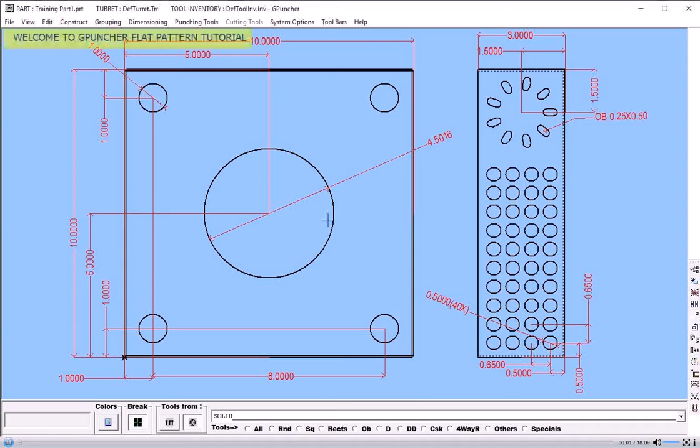This tutorial is about how to do the layout from a print. You can see the part has 10 inches in X and 10 inches in Y, and it also has 4 flanges coming up at you, which is 3 inches in size. And it has a circular pattern.

As you can see, it's an obround, and it has a square pattern with a round half of an inch. The main base has 5 holes: one in the middle, which is 5 inches, and 4 holes at the corners, typical 1 inch by 1 inch, each 1 inch diameter.

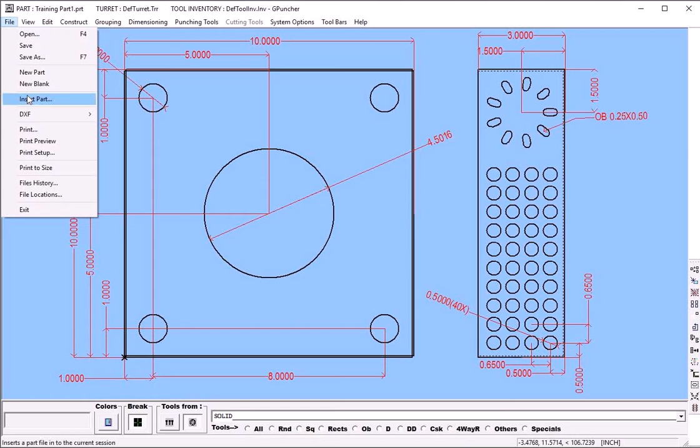So we're going to do the layout from this print, okay? We're going to start by saying File, New Blank, correct? As I said, it was 10 by 10, so I'm going to leave it as is, and start with a dotted line, and just click OK. So it goes to the sheet, and we're going to go back to the part design, where we're going to start designing the flat pattern.

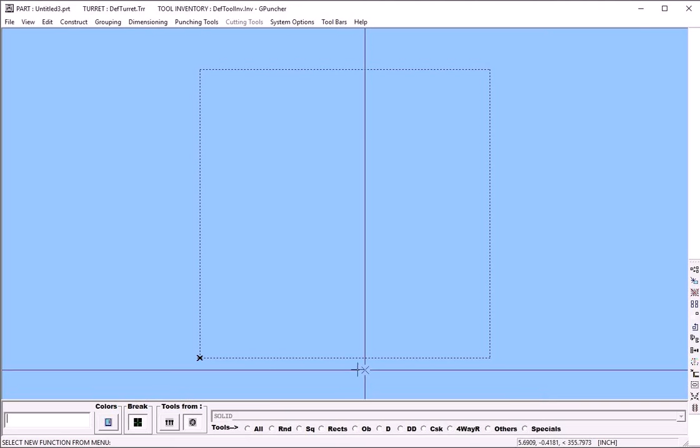And there we go, we have a 10 by 10 inches base, and right away we're going to insert the holes that you were looking at in the part tutorial, okay?

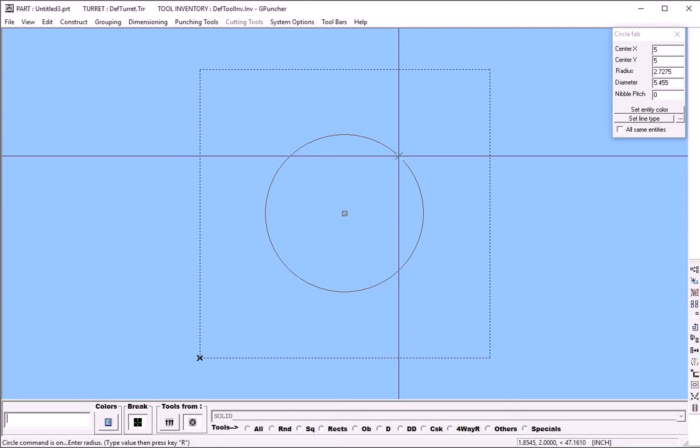I'm going to start with clicking the circle command, and I put one in the middle. I'm going to type in its coordinates, 5, 5, so we're right in the middle of the base. Now it needs a radius or diameter, but I'm just going to click it, and then come here and fix it to 5 inches and press enter.

You always got to press enter on any box where you change a value, no matter what box it is, okay? Don't forget to press enter.

Now I'm going to add the 4 holes at the corners. The first one, on the bottom left corner, the coordinates are 1, 1, and I'll press enter. This one, I'm going to control the radius or diameter differently, using a keyboard shortcut, which I'll show you in a minute. I'm going to type in 0.5, which is half of the diameter, and press the letter R, as in Robert, for radius, and there we go. It became a 1 inch diameter, as you can see here.

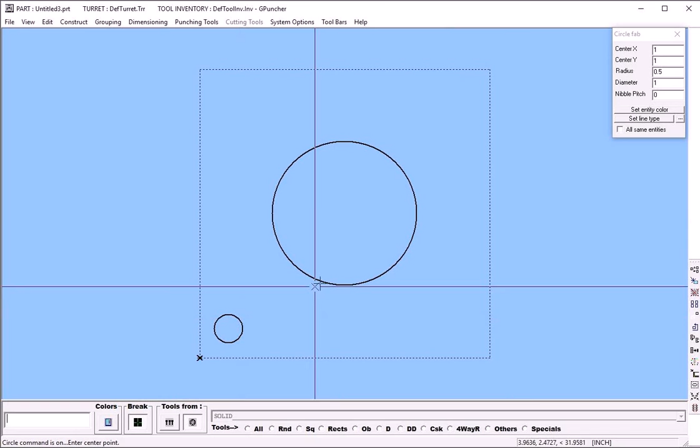Keyboard shortcuts. You can always get help and see what the letters do, like the letter Z, which activates the zoom in command. The one we use is R, which sets the radius of any geometry, and that's the one we use to create a hole, okay.

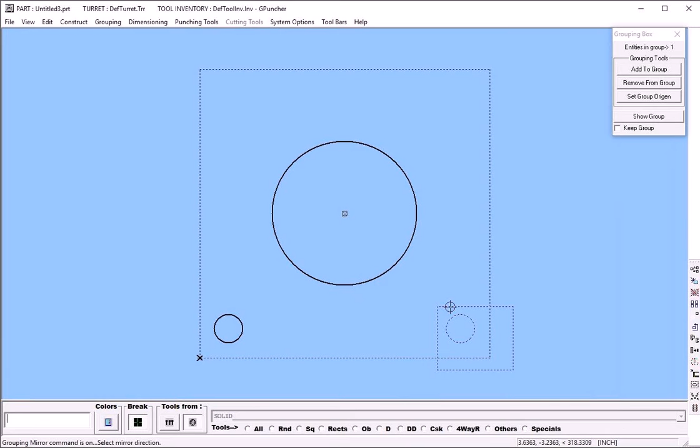Now continuing with the training, I'm going to mirror this hole 4 times at the 4 corners, which is typical. So let's use the grouping and mirror command and make a box. I'm going to find the center of the part, which is right in the middle. I do a right click to find the center of that hole, and a left click to grab it. Now, to mirror this feature to the 4 corners, I'm going to say keep group, so I can do so. I'll left click here, left click to carry on the command. And sure enough, now what's next?

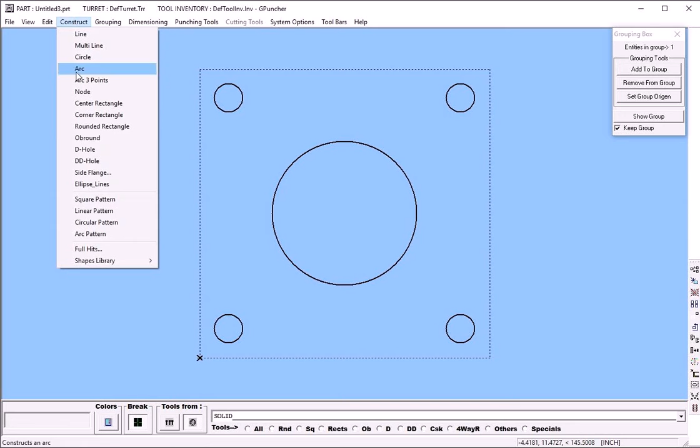Next is to add the 4 flanges coming at you. When you bend it, you're going to be looking at these 4 flanges coming at you, and we're going to do so using a menu command here called side flange.

Immediately it asks you for a bend deduction. You're going to find out that that's what you're going to use for 16 gauge, okay? Let's think about this part as 14 gauge, so around for 14 gauge in your shop you might be using 110 thousandths. I'm going to press enter, and the flange is 3 inches.

So make sure once you set your bend deduction and flange height, all you got to do is click the lines. It's going to ask you inside or outside, and of course we want it on the outside, and you go on. Okay, simple, no big science on this.

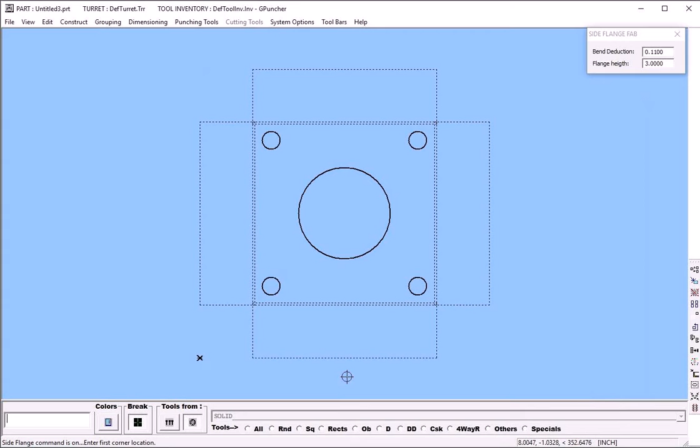Okay, you've got the 4 flanges coming up at you, and you can easily verify them. As you can see here to here, you're going to see your bend deduction, and from outside to outside, this is your flange size, 3 inches, and it's the same for all 4 flanges.

I'm going to delete all the text, and we're going to keep going. You saw we have the square pattern around this area, and that's what I'm going to add.

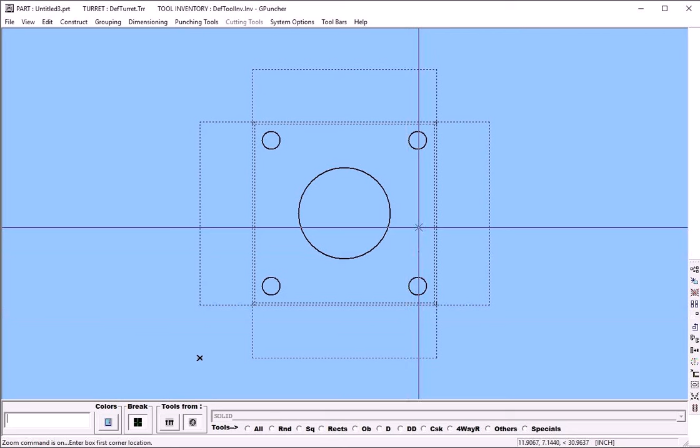I'm going to click on construct. Actually, let's do this—I'm going to show you how to move your origin point. There are two origin points. We're going to use the movable origin point right now, and I'm going to zoom in. I'm gonna place it right at the corner. Let me go back and say move origin, place it right at the corner, and from there we're gonna create our square grid.

I'm gonna say construct, and it's a circle. We click on circle, and the coordinates are 5 to the right and 5 up. So I'm gonna say 5, 5, and press enter.

Okay, I made a mistake. It's okay to make mistakes—just get out and come back in and say 0.5, 0.5. Make sure the values are correct and press enter. Now this point is asking for the diameter, so I'm gonna say half of it, 0.25, and press the letter R for radius as the shortcut describes it. The keyboard shortcuts—I just press the letter R as in Robert. There we go, we have our first hole.

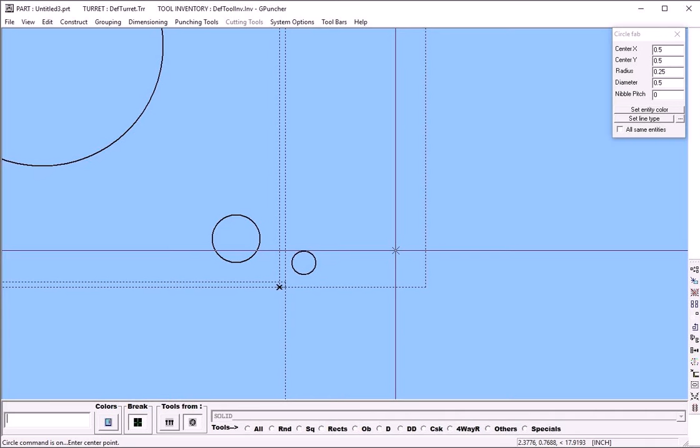I'm going to scroll down a little bit, and now the next thing, we have a command here on construct called square pattern. I'm going to grab the hole, and the distance in between the holes is 0.650, 0.650. Type it in and press enter. All you got to do is drag your cursor along and count the holes. I want 4 in X and 8 holes in Y. You can see the number on the right upper corner. So I'm going to do a left click to carry on.

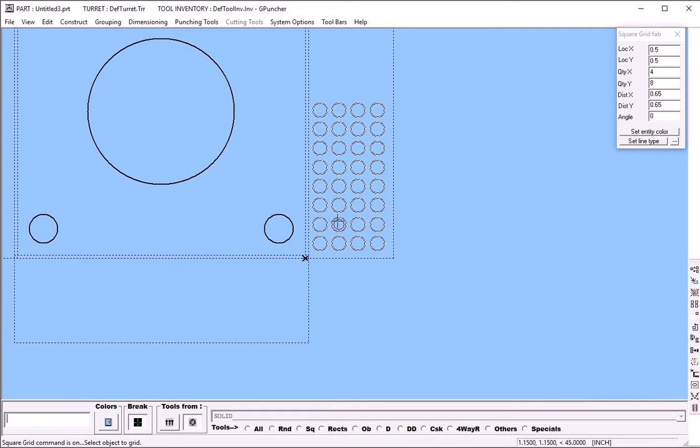Now I'm going to go back and see the full part. You can go here and say zoom fit, which is okay, or you can use the keyboard shortcut letter F as in Frank, which is quicker. So let's keep going.

Now I'm going to add the circular pattern around this area. For that, I'm going to go to construct, click on obround, and zoom in on that area.

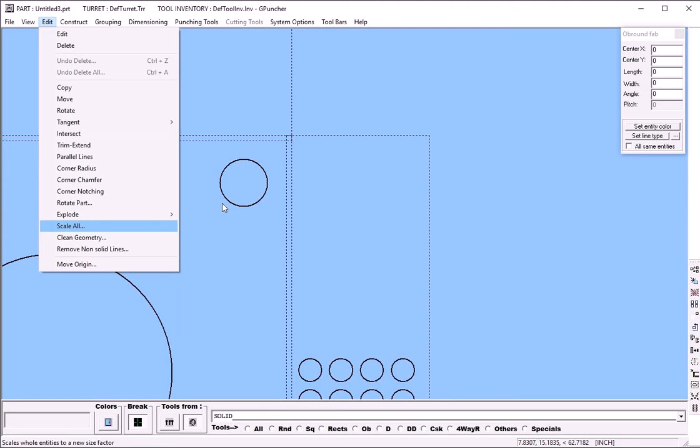As I said, you can always move your origin point, but we have two types of origin points. So I'm going to use the keyboard shortcut, pressing the letter O—remember, it's described here under keyboard shortcuts. I'm going to do a right click to start snapping to points, and place it on the outside of the flange.

Now I know the coordinates—you got to place it right in the middle of the circular pattern. So I'm going to say 1.5, comma, minus 1.5. There we go, the obround is going to be right in the middle.

At this point, what's next? Next is to lock up the angle. You can always lock it up by typing in the angle—I'm going to say 0 and press the letter A as in apple, as in angle. So you lock up your obround at 0 degrees, and you can see it on the right upper corner box. Angle, it says 0. It's like that, it's not going to change.

Now what I need is the length. Remember, your temporary origin point now is in the middle of the obround. So what are you going to do? Type in the length from the middle to the end point. If it's going to be half of an inch, type in 0.25, and you can always press the letter R to lock up the radius or length, or press the letter X. As a general rule, I would use the letter R because it works in any angle. So I'm going to press letter R, and as you can see on the right upper corner, it says 0.5 length.

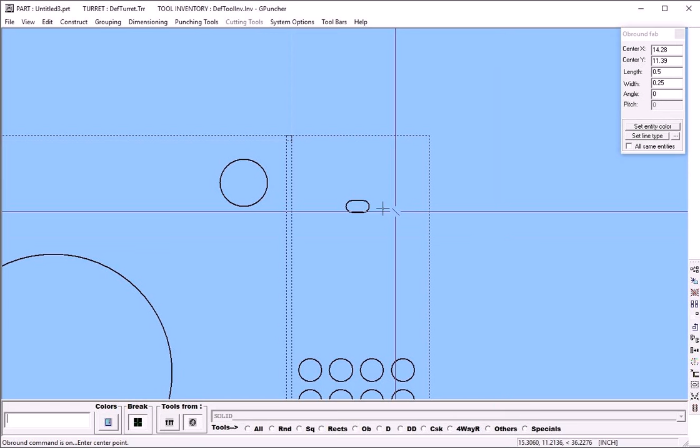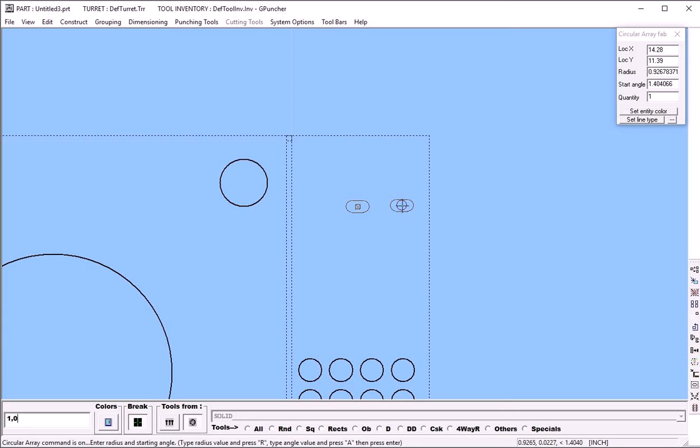Right, now we need to convert it into a circular pattern. So we're going to say construct, circular pattern, and I'm going to grab it. Now I know it's 1 inch in between holes for the starting hole of the circular pattern, so I'm going to say 1, 0. You can see the temporary point now is in the middle of the pattern, right there.

So that's why I say 1, 0 and press enter. My first hole starts 1 inch away from the center. Then you drag along your cursor and get the amount of holes that you want. In this case, I want to get 8. I'll do a left click and it's fully done, okay?

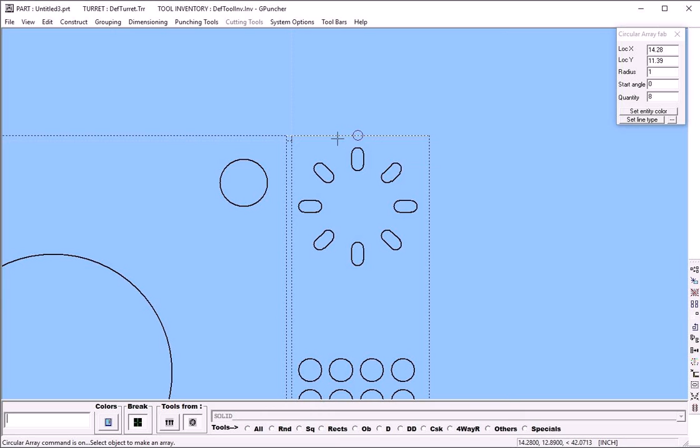Now, as I say, you can always come and say zoom fit, but I'm not going to do so. I'm going to just use the letter F, as in Frank, as in full view, okay? And it's described on help, keyboard shortcuts.

We're almost done. Now all I need to do is construct the outside profile that I want to punch. If I punch it like this, when you bend it up, it's gonna crash. So I've got to cut a material thickness here and a material thickness here.

There are two ways to do it. We're gonna do the first way on this corner and the second way on this corner. In fact, you might find out later that you can do many ways, okay?

So the first thing I'm gonna use is the parallel lines. I'm gonna zoom in, press the letter Z, as in zebra, as in zoom in, and get there. And I'm going to do the offset, the parallel lines.

Matter of fact, I made a mistake. We said it was 14 gauge. I'm going to delete it. As I said, it's okay to make mistakes.

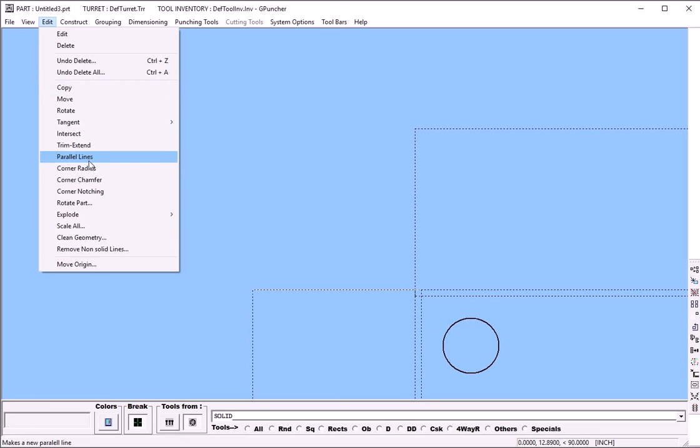And I'm going to go back and say parallel lines, and I'm going to type in 0.074, okay? And I'm gonna offset that line.

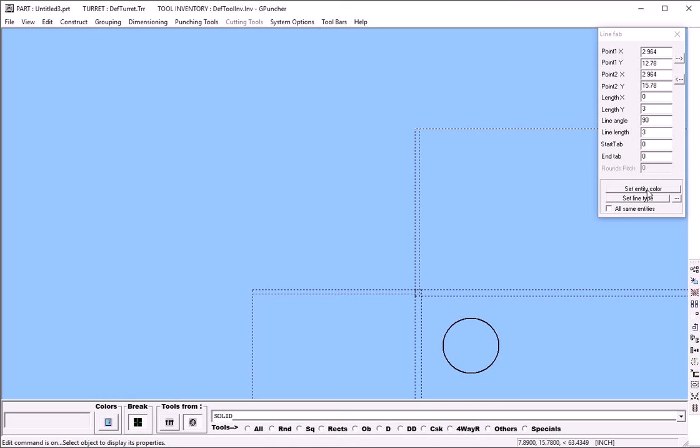Next, I'm going to convert it into a solid line. I'm going to use the edit command. With the edit command, you can change any geometry, anything. As you can see, a bar comes up with the parameters for this line, and you can change it, okay? Any parameter. In this case, I just want to set the line type to solid.

Now I'm going to click on the other one, and easier, you can also just click on the little button here and say - just click it, and it's going to convert it to a solid line.

Now I'm going to zoom in, press the letter Z, as in zebra, as in zoom in. As you can see, the lines pass each other. So I'm going to press the letter P, as in Peter, for previous view.

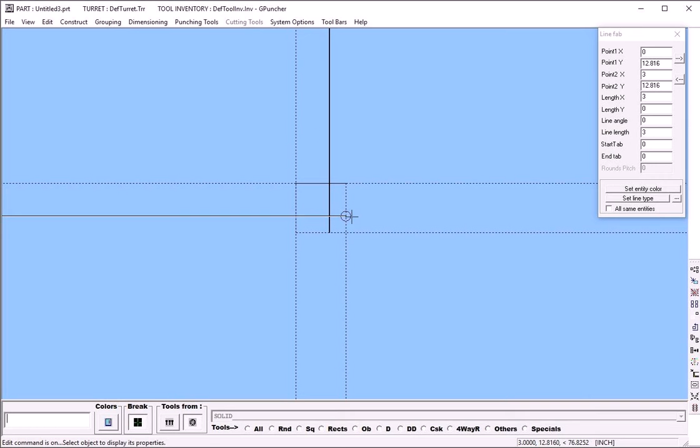You could always do the previous view here, but let's use the letter P, as in Peter, okay? And we get back to the last view. You can keep pressing the letter P over and over, and it will switch between the last two views, okay? At this point, I'm going to use the trim extend command.

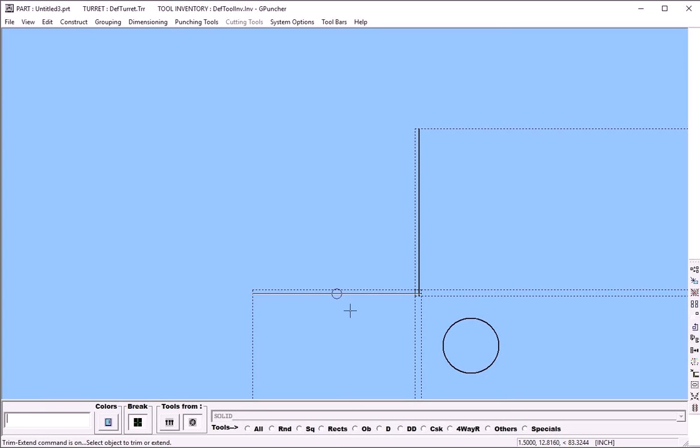I'm going to trim this one up to this one, and this one up to this one. Pay attention now, it trims it, okay? I'm going to zoom in so you can see it's trimmed. Now they meet each other.

I'm going to press again the letter P for previous view, letter F for full view. And now I need to do, I'm going to use the second method on this corner, okay?

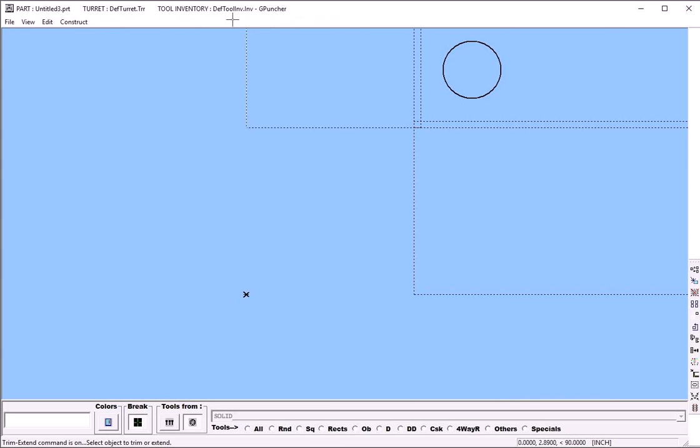So I'm going to zoom in. And what I'm actually going to do, I'm going to draw it. I'm going to say multi-line. As I said before, you can move your origin point by pressing the letter O. The temporary origin point takes priority over the movable origin point, okay? So whatever you type in is going to come off from this temporary origin point.

So I want to go 60 thousandths up, so I'm going to say 0.060, okay? And I'm there.

Now watch what I'm going to do. I'm going to do a right click to lock up to that line. You can always lock up or not by right click. Now it's free. I'm going to do another right click. I can lock up to any point. If you do another right click, it's free. The cursor is free. Right click, I'm going to lock up. At this point, I'm going to see the length in X.

So I'm going to say, you can see it on the right upper corner box, it says 2.89. But I want to go plus 60 thousandths, so I'm going to say plus 60 and then comma.

That's what I want to move in the X direction. I don't want to move in Y, reminding you that the temporary origin point takes priority, and it is on the other end at the end line. Of course, I want a straight line, so I don't want this line to move in Y direction, I'm going to say 0. Press enter, and there we go. That's exactly where I'm going to be.

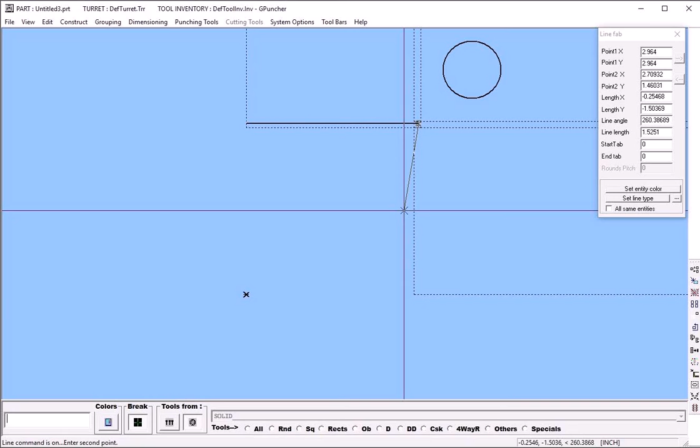Now I'm going to do a right click. At this point I can see the length in Y, and I can do the same, just type in 0 and minus 2.964, which would be okay. And it is in the back, you can see it there. But I'm going to do a different way.

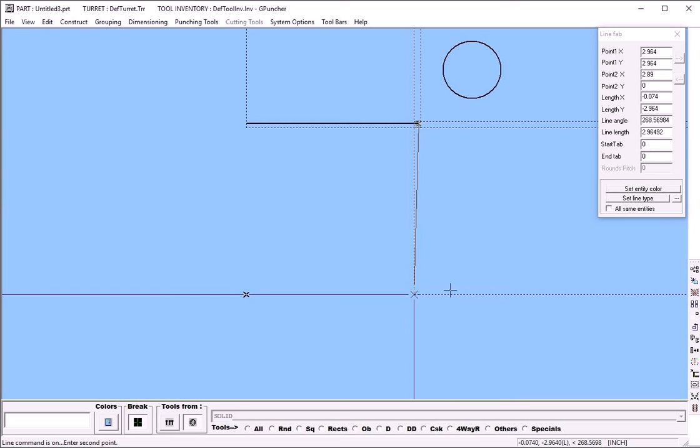I'm going to lock up the Y direction. How do I do that? I press the letter Y, so I'm going to press it. As you can see, you can try to move, and it doesn't move in the Y direction because I pressed the letter Y. You can see on the right bottom corner, the coordinates, the letter Y has an L in between parentheses, which means it's locked up.

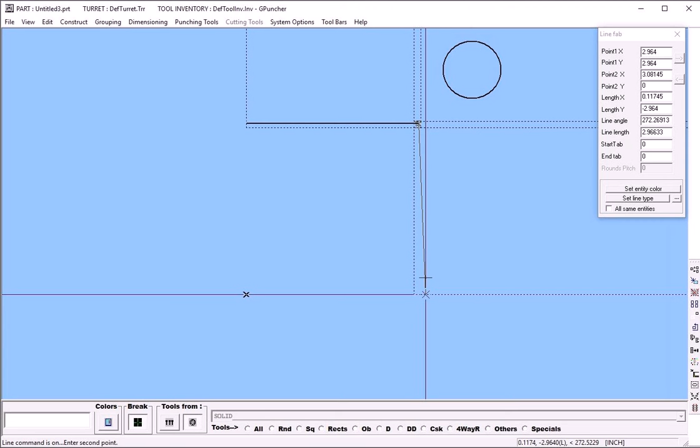Don't forget that your temporary origin point takes priority, and it is on the other end of this line that we're making. I don't want this to move in X, I want a straight down line at 270 degrees. So what I can do is type in 0 and press the letter X because I don't want it to move in X. So I press X, and there we go. We got that line without typing any number.

So what I'm going to do is press the letter F, as in Frank, for full view. And to finish up this part, I'm going to mirror this detail to this corner. So I'm going to say grouping, mirror, and I'm going to get in the box where I want to mirror. Of course, the center of the part is the center of this hole, so I find the origin point and do a left click.

Now I'm going to mirror two parts. If I click right now, the command is going to dissolve, and I don't want to do that. So I'm going to keep it, I'll say keep group, and do a left click there and a left click there. Now all I got to do is connect the line, right?

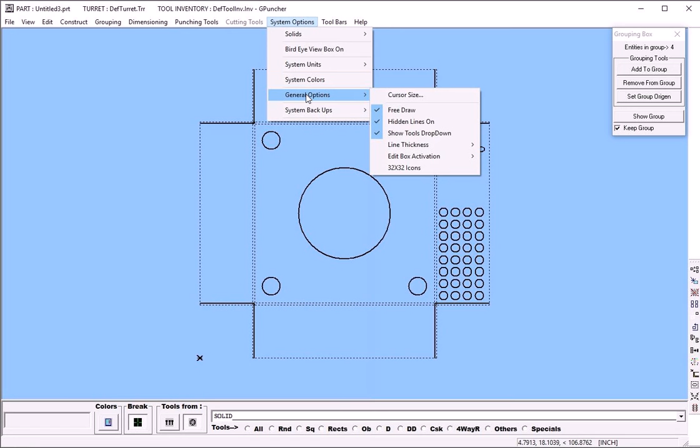There is a command here in system options called hidden lines. I'm going to turn them off. Without the hidden lines we don't see it anymore, which makes it easy to connect the lines.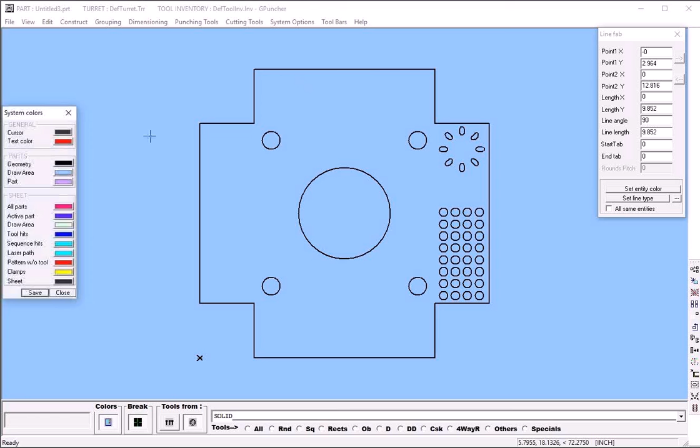No big science to this, connecting the lines: right click, left click, right click, left click. And I'm going to turn the hidden lines back on. I'm going to go to system... oops, sorry, to fix mistakes, I'm going to say general options, hidden lines on, and the hidden lines come back.

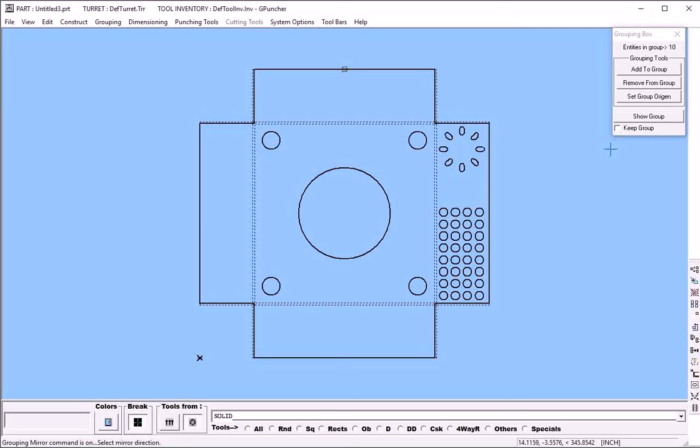Now I need to mirror these patterns to the left side, so I'm going to use the mirror command again. Find the center in X for my mirror command, which should be there. And I'm not going to turn on the keep group option this time, because I don't want to keep the group, I just need to do it once. And I do a left click when I see it there.

And I'm fully done with the part, exactly like the training part at the beginning. Hopefully this shows you how to easily do the flat pattern on any project.